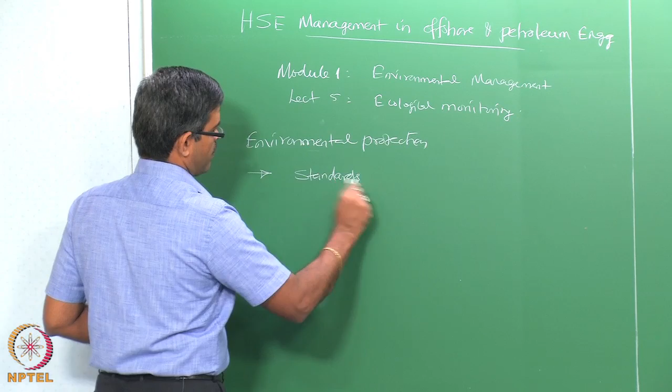If we talk about environmental management, let us say we lead towards establishing or framing standards and requirements. What should we actually consider when we start framing such standards and requirements, or when we are revising them? The standards essentially important to implement environmental protection and govern implementation of management policies should include the following factors.

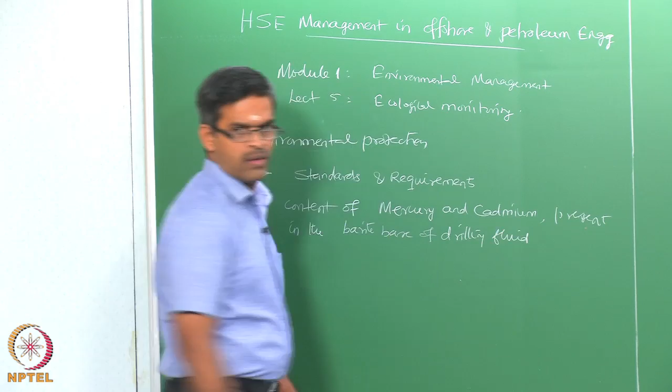The first factor we must consider should be, most importantly, the content of mercury and cadmium, which are very harmful for marine species, present usually in the barite base of drilling fluid, should be restricted and kept as minimum as possible.

The second point is that no discharge of drilling fluid is permitted in waters within 3 miles from the shore. So no discharge of drilling fluid is permitted within 3 miles from the shore.

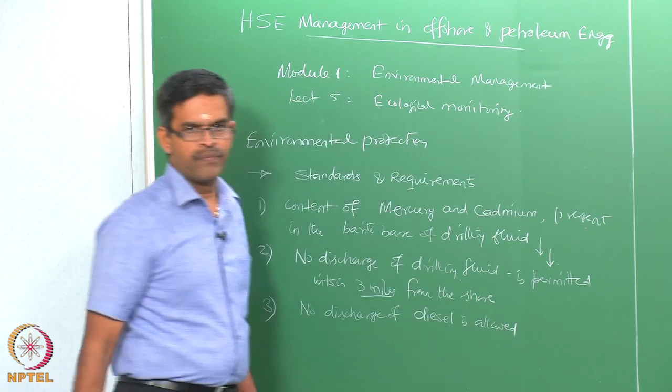At any cost, no discharge of diesel is allowed. At any cost, no discharge of free oil is allowed. This can be checked using a specific test called the static sheen test, used to check the discharge of free oil sleek on the surface.

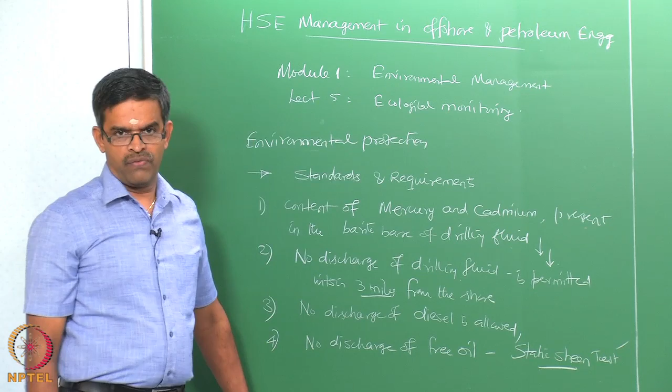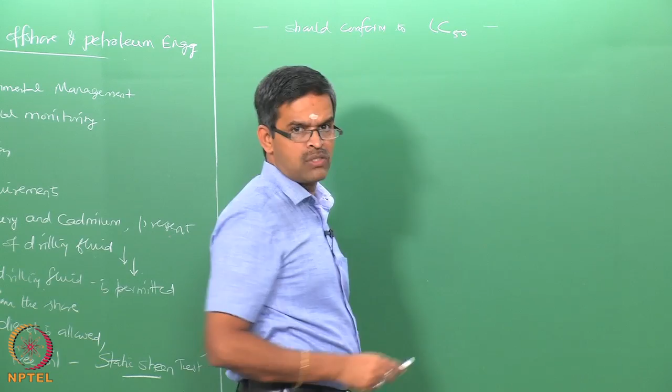This test should conform to LC50 values, that is, lethal concentration 50, we already gave the figure in the last lecture, which should be arrived at based on Mysid toxicity test.

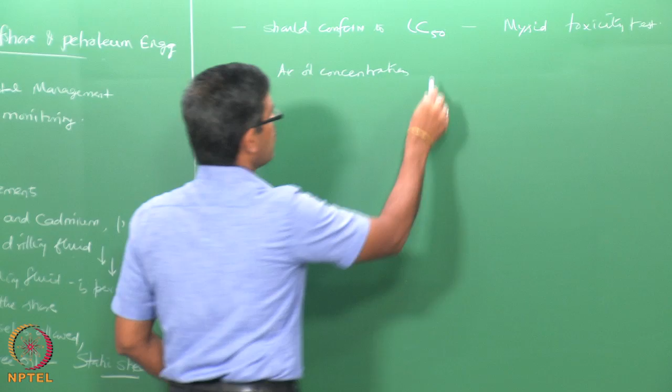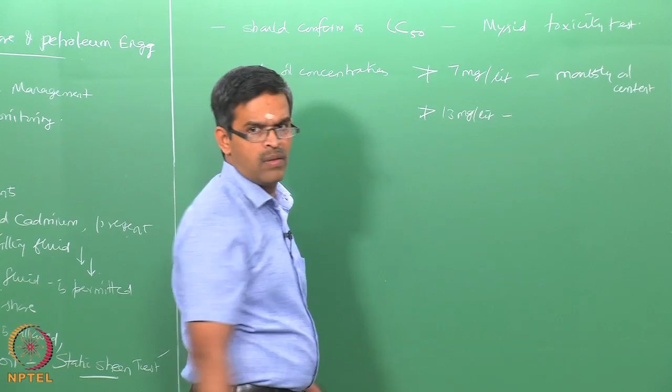Now, the average oil concentration when discharged should not be more than 7 milligrams per liter on a monthly basis, or 13 milligrams per liter on a daily oil concentration basis.

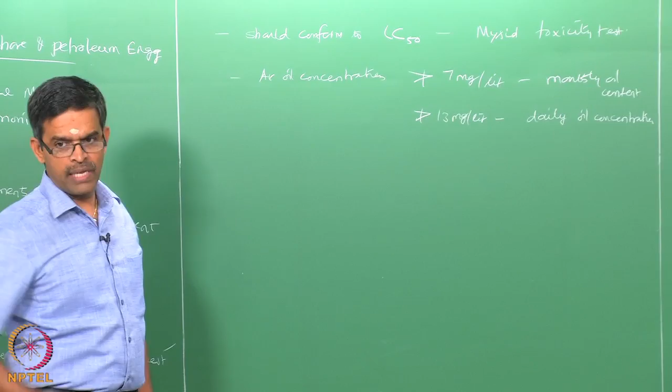Now, the question comes, when an oil leak or oil concentration is found on surface waters, you need to measure them, take a sample, and do the test in the lab to find the toxicity. You also have to take a sample and do the static sheen test to check whether the oil concentration is within permissible limits on a monthly or daily basis.

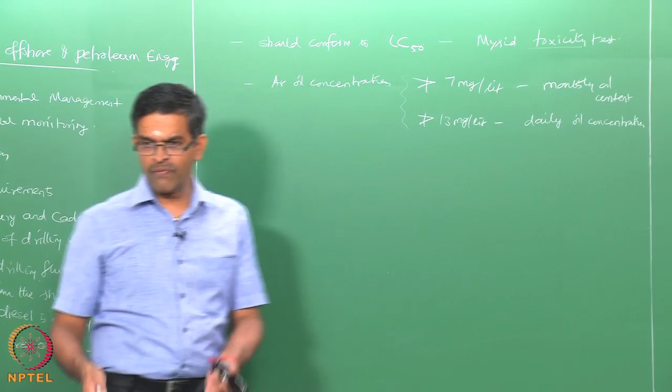Now, where will you collect this sample? Obviously, when you collect samples very near the source of discharge, the concentration is likely to be higher. When collected far away from the point of discharge, they will be lower. So you have got to also specify where to collect this sample. The discharge should be measured within 4 miles from the shore.

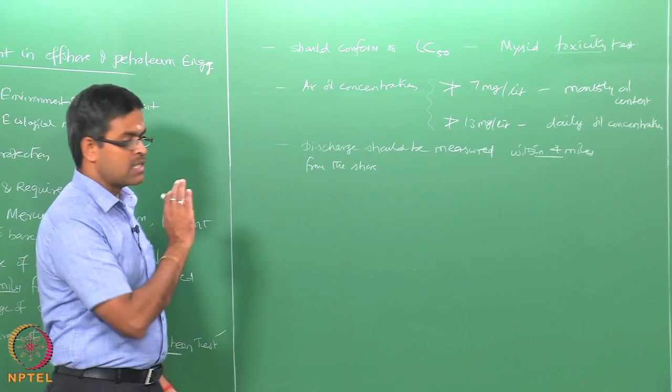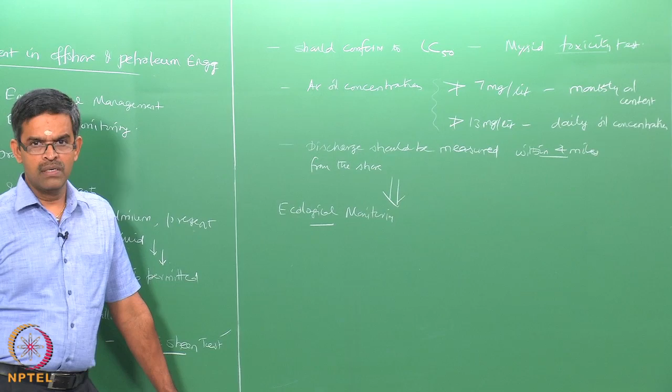This is to check whether it is toxic or non-toxic, or whether it is within the standards prescribed by the rules and regulations of the local agency or not. So all these come under a single frame of discussion, what we call ecological monitoring. Ecological monitoring is an activity, a basic method used to control and manage activities related to marine pollution. It is a system which collects information about changes in natural parameters that occurred due to oil pollution in open sea.

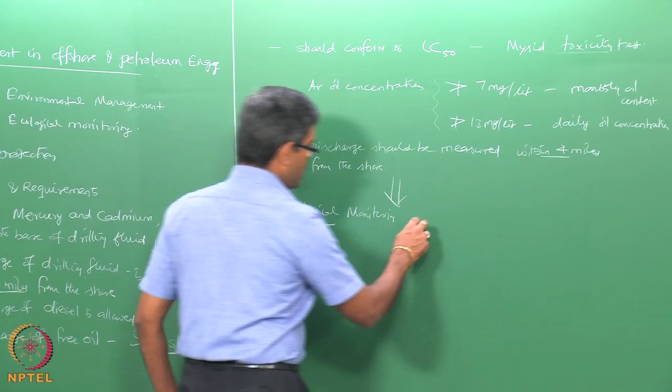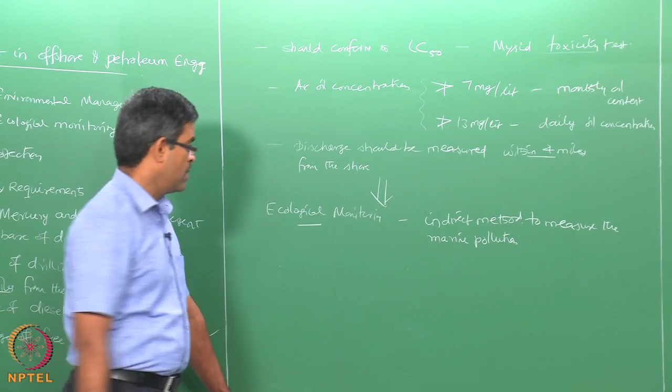So actually it is an indirect method to measure marine pollution. One may ask why it is an indirect method. We are not interested in measuring the concentration of discharge, volume of discharge, etc. Then what are we measuring? We are measuring the consequences that arise from the discharge on sea life.

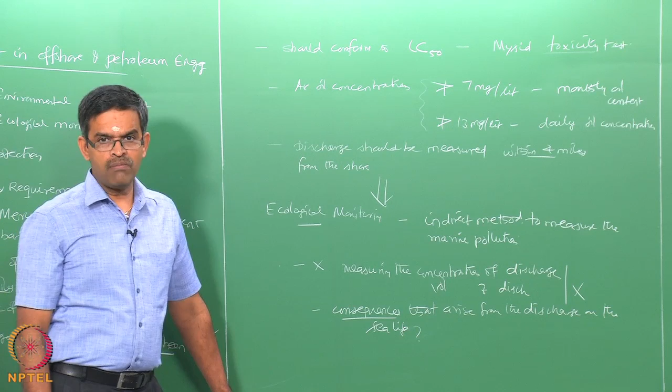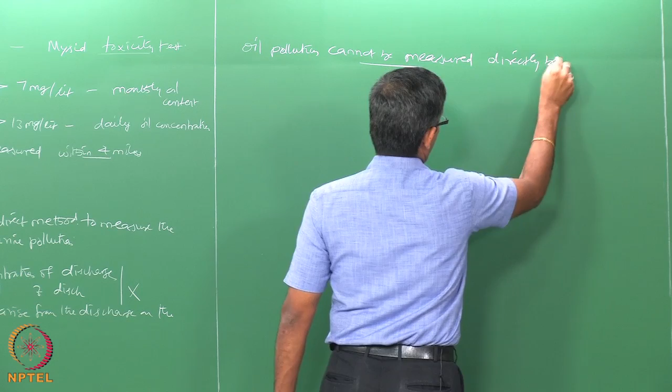Now, one may ask why we are interested in measuring consequences indirectly and then checking whether the pollution is within standard limits. The basic reason is pollution arising from oil cannot be measured directly because of its complex composition. That is one reason. The second reason is its availability in different forms.

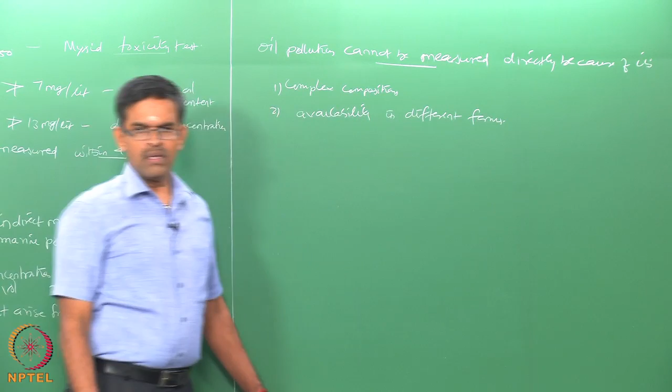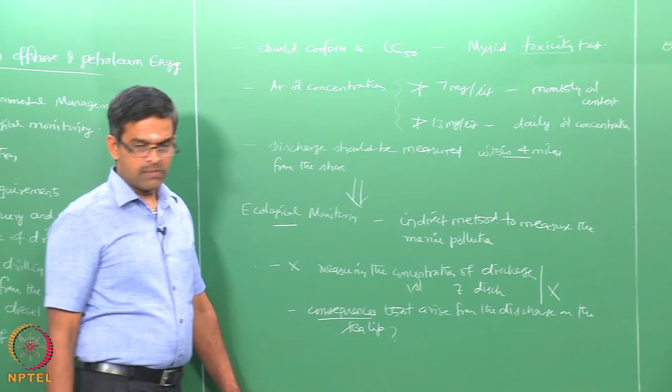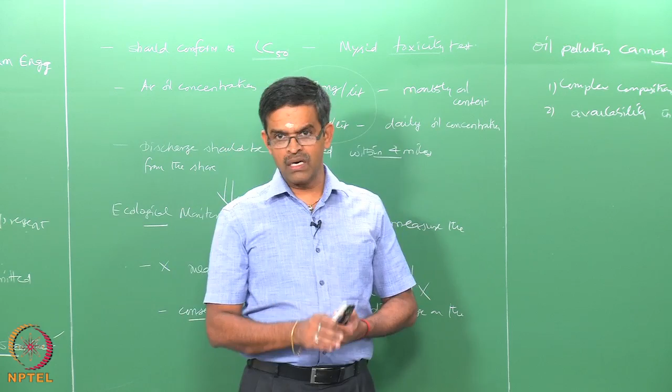Ecological monitoring is a method which collects information about changes in the natural parameters of marine organisms which occurred due to oil pollution. So it is actually an indirect method of monitoring.

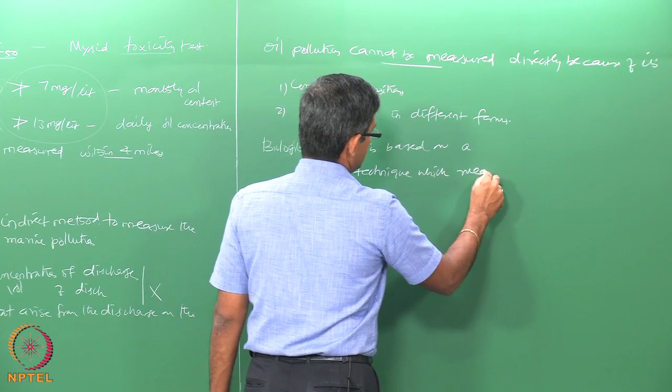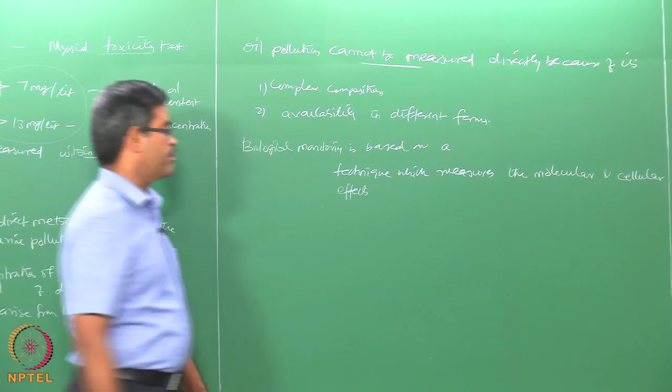You can also monitor this using a biological manner. Biological monitoring is based on a technique which measures the molecular and cellular effects under low levels of impact, which cannot be measured by chemical analysis, because the levels of impact are so low that chemical analysis cannot capture them.

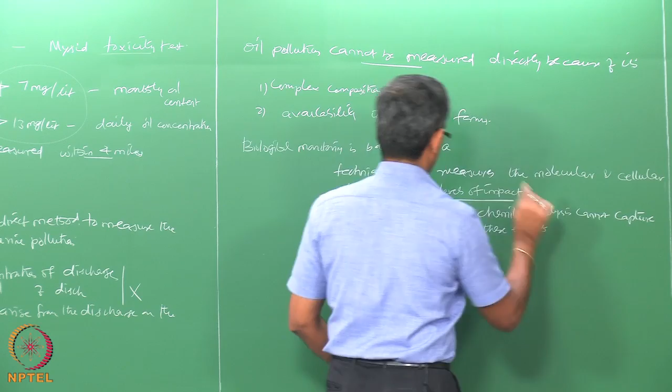Biological monitoring is also a technique which indirectly measures the molecular and cellular effects on marine organisms. Therefore, friends, ecological monitoring in offshore production is done at the local level.

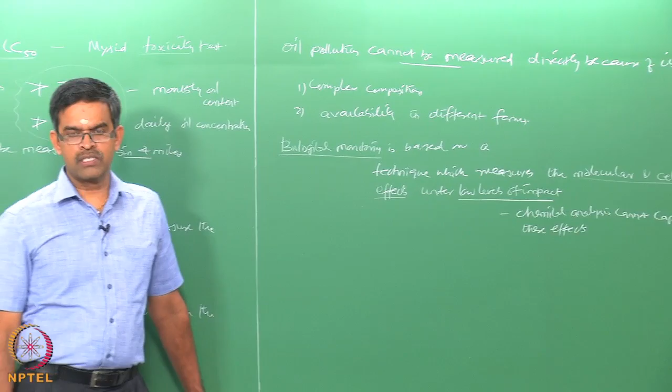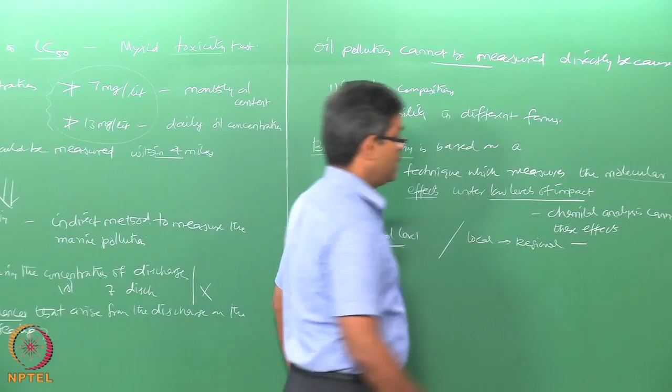You cannot do this at the global level, because the concentration is more local, then regional, and then if it is very severe, it can get globalized, which we already saw in the previous lectures.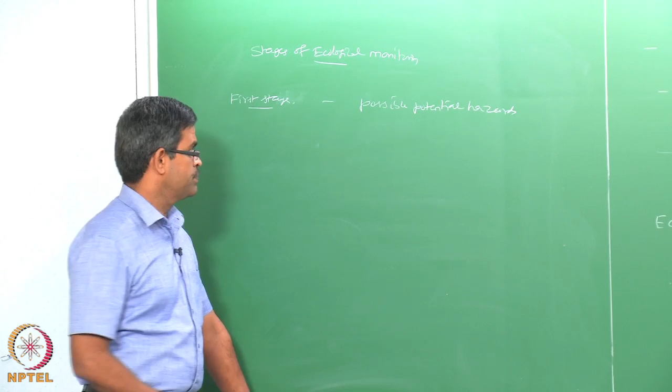Now, ecological monitoring is done in different stages. In the first stage, you have to identify the possible potential hazards which can arise from the impact sources.

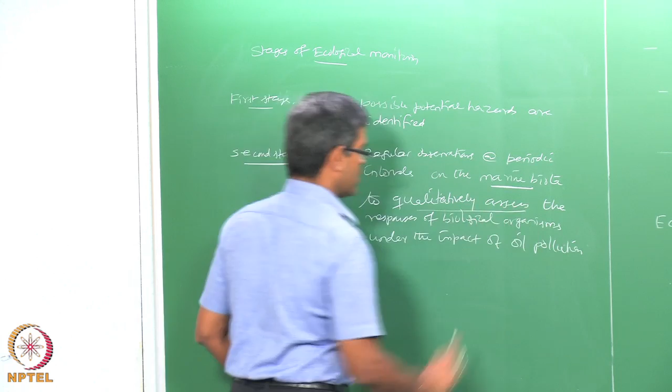In the second stage, you make regular observations at periodic intervals on the marine biota. So it is an indirect way to qualitatively assess the responses of biological organisms under the impact of oil pollution. We measure the qualitative assessment on biological organisms - how they behave, how their functionality is affected, how reproduction is retarded or increased, etc. So you are measuring the consequences with a qualitative assessment - that is the second stage in ecological monitoring.

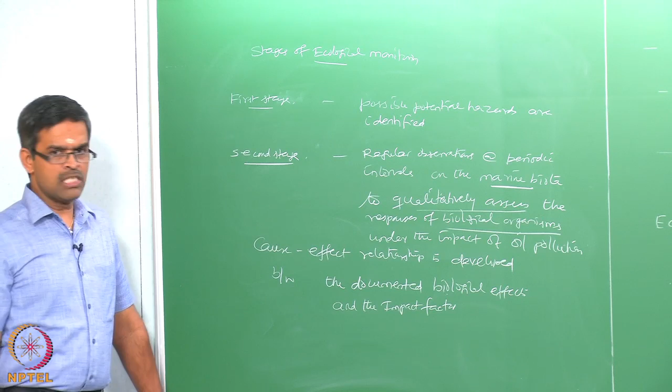Based on this, you develop what is called a cause-effect relationship, established between the documented biological effects on the species and the impact factor. The total impact on the environment and biota, including the impact on commercial species and biological resources, are assessed at this stage.

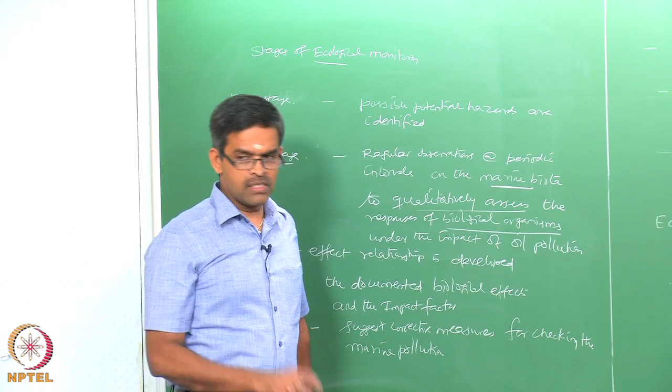Finally, in the third stage, we suggest corrective measures for checking the marine pollution. We can also recommend certain preventive measures if necessary, so that marine pollution can be kept under control within permissible limits accepted globally, regionally and then locally.

Let us slightly move on to the discussions on environmental pollution or environmental management from offshore to onshore. We already know once the oil or hydrocarbon is identified, it is produced or drilled from a specific source as crude oil, and transported to shore for processing. However, these days processing is also done on the offshore platform itself, so that you can save the cost of transporting crude oil, which after processing gives about 60 to 65% waste.

So people are not interested in transporting crude oil from the platform to onshore for processing. They would rather process the commercial product on the platform itself and only transport the pure commercial product for sale directly, so that the discharges or effluent waste which exit from this kind of processing plant can be discharged back into sea waters.

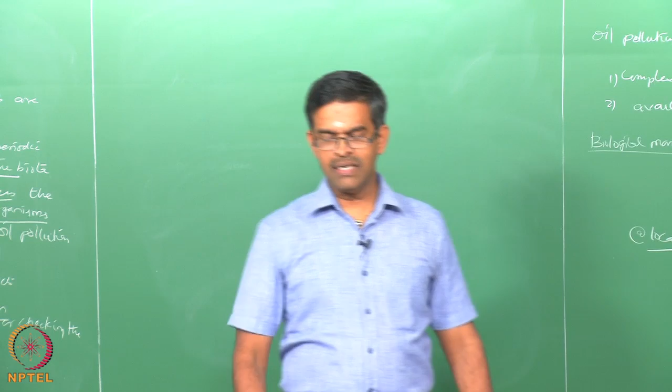So there is another precarious movement which an offshore engineer or environmentalist should seriously focus on. If processing happens on the offshore platforms itself, the discharges which came from oil by accident will now become intentional, because these will all be discharges from the processing plants. However, in the present scenario, these discharges do come to the sea, but they do not come from the offshore platforms - they come from the onshore processing refineries. So we include them in this case as well.

Now, most important aspect here in terms of onshore activities, where we talk about processing industries which do refinery for converting crude oil into commercially available trade species, the most important concern generally comes to atmospheric pollution, essentially caused by the refinery industries closely associated with oil and gas production scenarios.

So to understand atmospheric pollution, we have in the literature two exclusively specific models which are called release models and dispersion models. The release model identifies the type of release of the material.

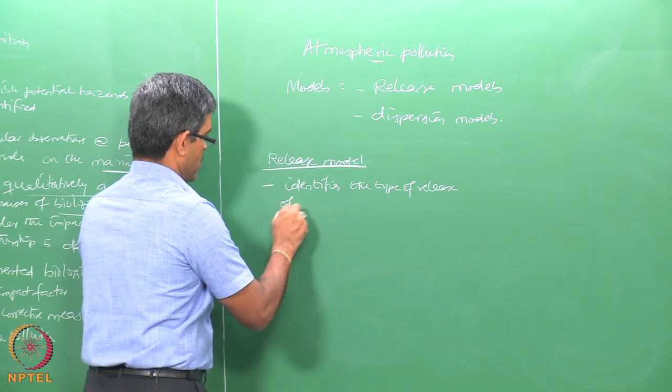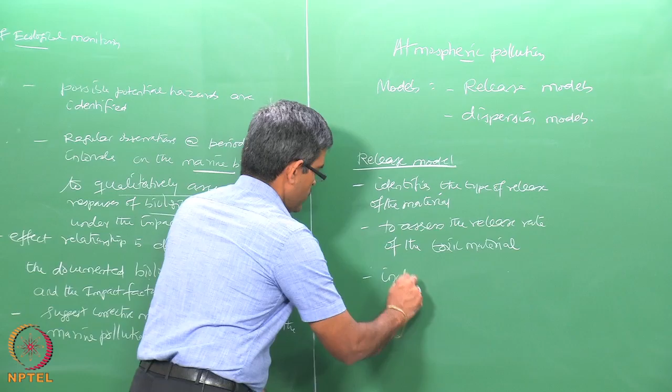This model is essentially used to assess the release rate of the toxic material into the atmosphere. It of course includes estimation of downwind concentration of the released material.

Alternatively, the other model used to capture or understand atmospheric pollution is called the dispersion model. As the name suggests very clearly, this describes the dispersion of vapor in the downwind direction. Now, there are three different kinds of vapor cloud behavior, and one can relate the corresponding time release models in the given literature.

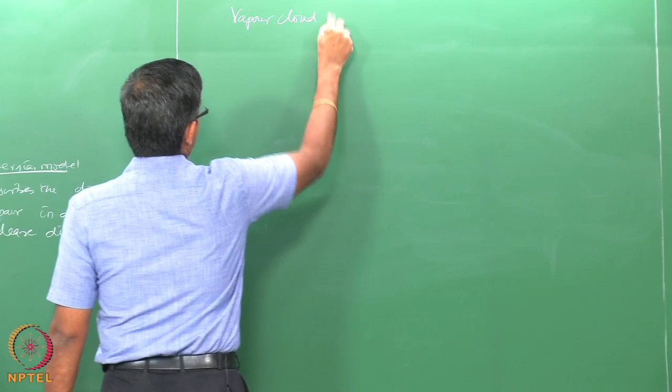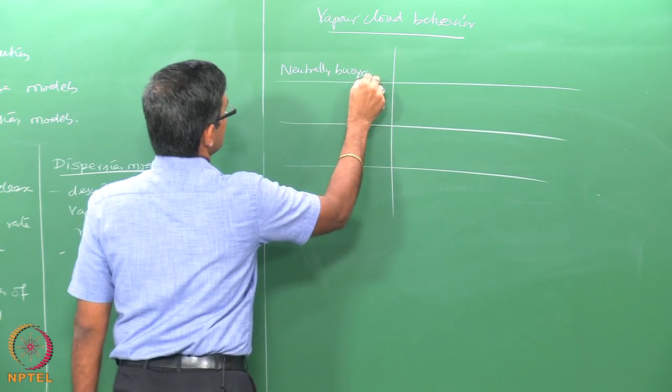The vapor cloud behavior has three essential features. One, it could be a neutrally buoyant gas, it can be a positively buoyant gas, it can be a dense buoyant gas which can form a cloud.

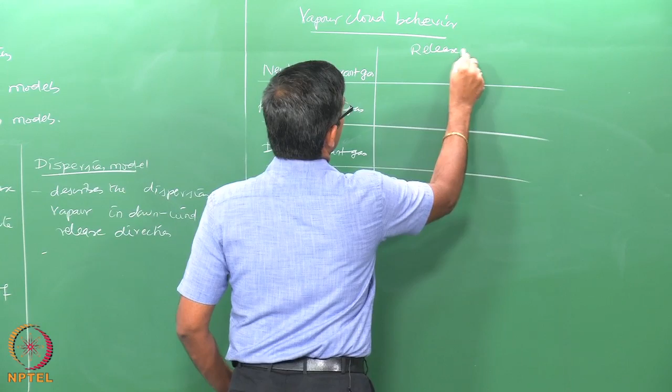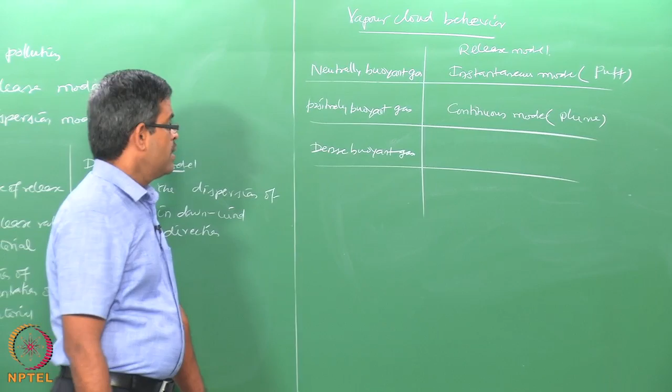The release model suggested to mathematically model this is, for example, in neutrally buoyant gas people use an instantaneous model, called the puff model. To capture the vapor cloud behavior arising from positively buoyant gas, one can use a continuous model, called the plume model in the literature. If you want to model the vapor cloud behavior that arises from the dense buoyant gas, one can use a continuous time varying model.

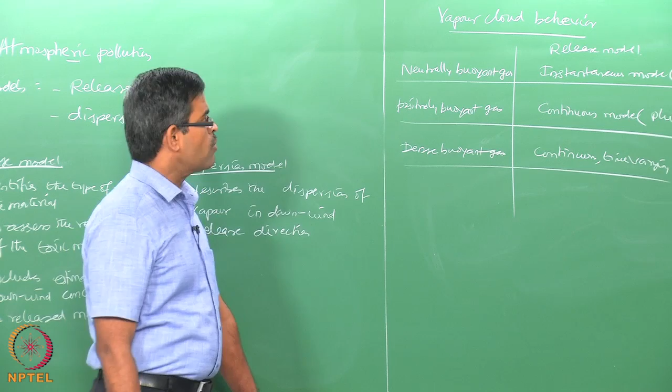So these are the three ways by which the vapor cloud behavior which arises from different types of gas can be captured in terms of dispersion release models. Please look at the screen.

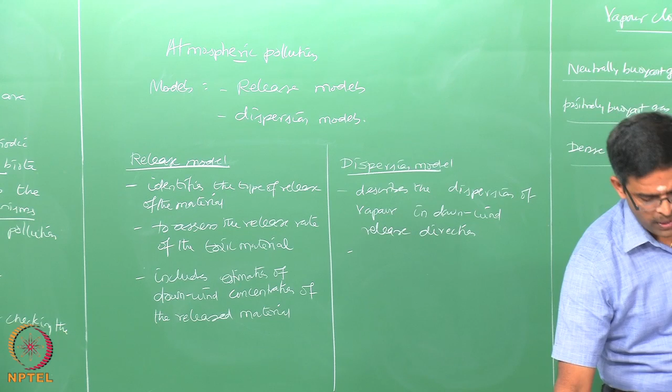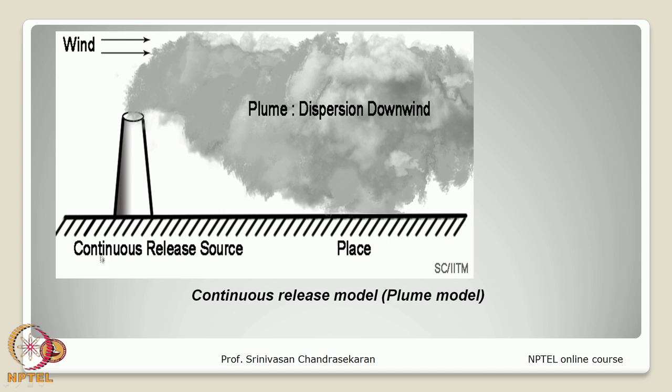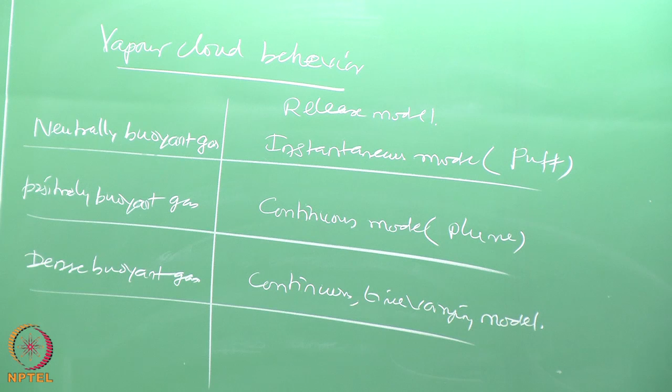Now let us look at the factors which affect dispersion. Foremost could be the wind speed. Depending upon the wind speed, the spread distance, the intensity, and the area of spread will also be governed. So essentially wind speed is one of the important characteristics which should be considered in the model.

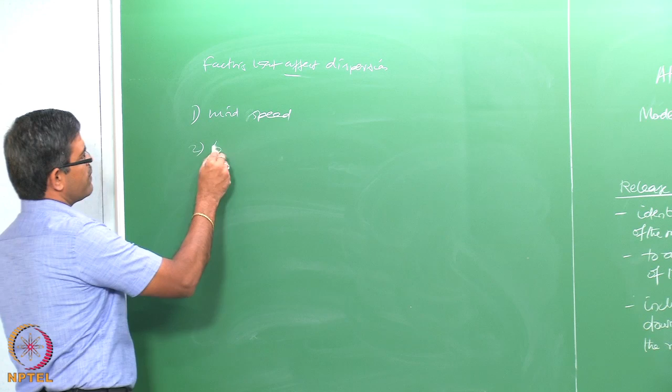The second could be the terrain effects. If the terrain is rough and vegetative, it will have a different effect on the dispersion, conversely with that of an open terrain.

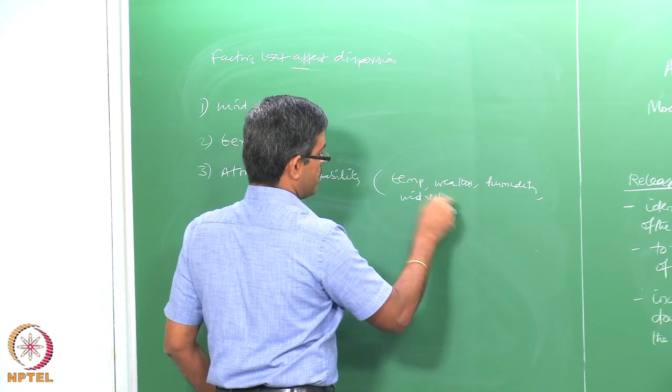The third could be atmospheric stability. What do you understand by atmospheric stability? Atmospheric stability relates to the temperature, weather conditions, humidity, of course the wind velocity and weather climate, etc.

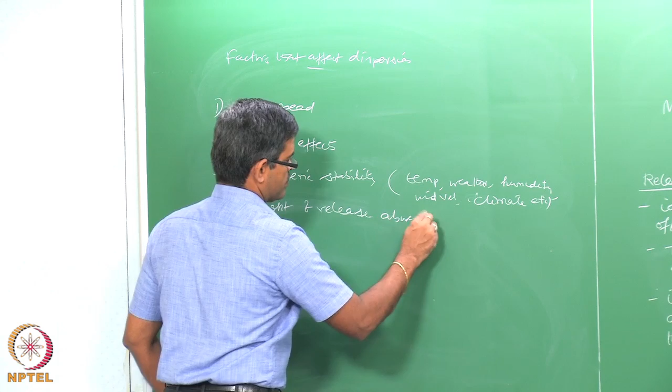So, atmospheric stability. The fourth could be the height of release of the gas above the ground. And lastly, and very importantly, the initial momentum of release. So these are the factors which affect the model that accounts for dispersion on the downwind side.

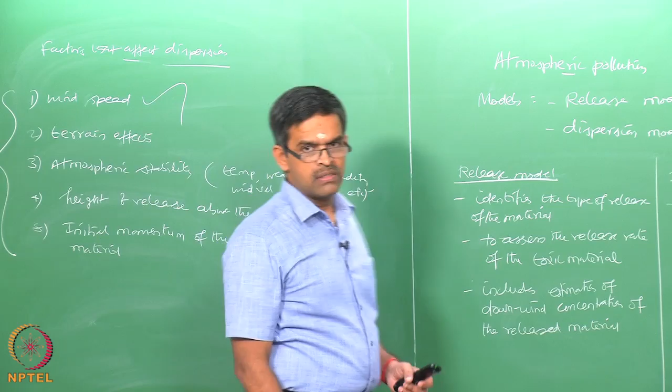Amongst these, let us talk about the first effect, which is the wind speed. The dispersed gas will initially get diluted with the passage of air. So let us look at the physical process. The dispersed gas, or the cloud, the vapor cloud, will get diluted with the passage of air.

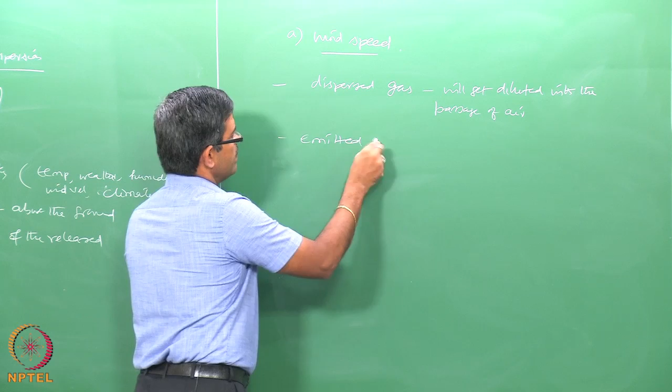Now the emitted gas which is released will now travel forward, and it will also travel faster because of the wind speed. So, forward plus faster. While it travels forward and faster, it further gets diluted because a large quantity of air is added during the travel.

So the foremost issue here is one would like to know what is the wind speed or wind velocity at any specific location. One would also like to know what is the dominant wind direction which is predominantly present in that geographic location.

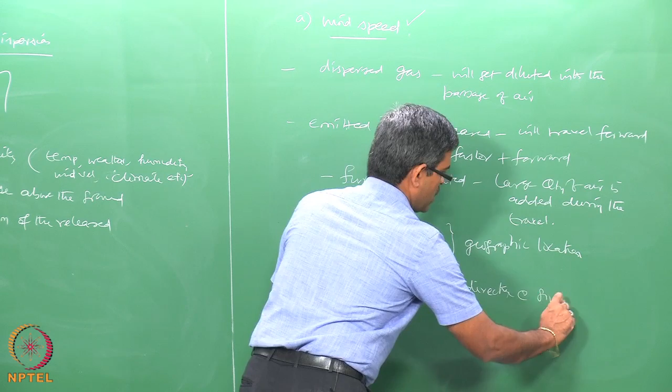One would also like to know what would be the percentage of contribution of wind speed versus direction at any given location of our choice. What does it mean? Does the wind flow at that location circumferentially 360 degrees, or is it predominantly in any specific direction? If so, what is the percentage of contribution of wind speed in that specific direction?

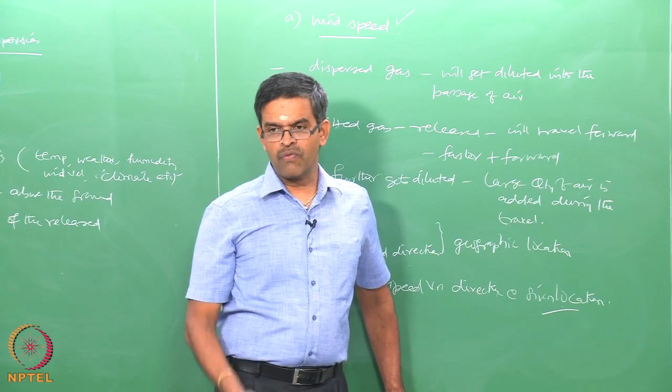On the other hand, you can always locate very easily the predominant wind direction. If you are able to locate the predominant downwind direction in a specific geographic location of your processing plant, you can always design your dispersion system in such a manner that the dispersed or emitted gas can get diluted at a much faster rate. Therefore, the pollution concentration can be diluted or reduced. So where do you get this data from?

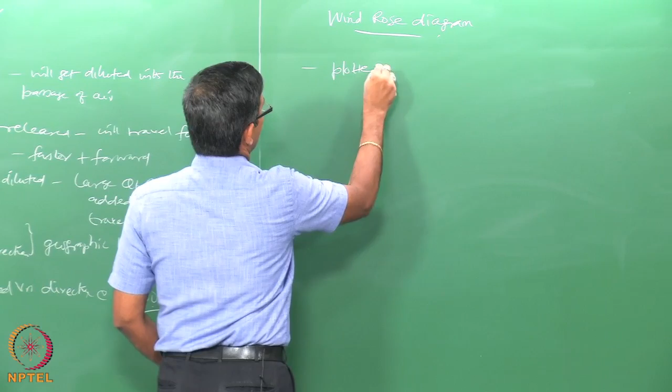We can get this data from what is called a Windrose diagram. Windrose diagrams are actually plotted for specific regions, I can even say specific locations of interest. This should show wind speed, wind direction, and relative frequency at which the wind is blowing.

Why do I say relative? Because compared to all directions circumferentially at that particular point, what is the relative frequency at which the wind is blowing in a specific dominant direction? One should like to know this. Then only you can design the dispersion system in such a manner that if the emitted gas is dispersed by accident, it can get diluted much faster, because the wind speed, wind velocity, and direction are designed in such a manner that the system can get diluted much faster.

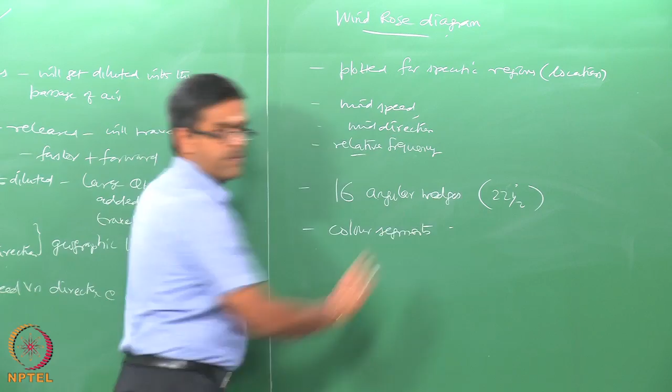So the Windrose diagram comprises actually of 16 angular wedges. So obviously 360 by 16, each wedge will be 22.5 degrees, equally divided. It contains color segments. Each segment represents a specific wind speed when blowing from a specific direction.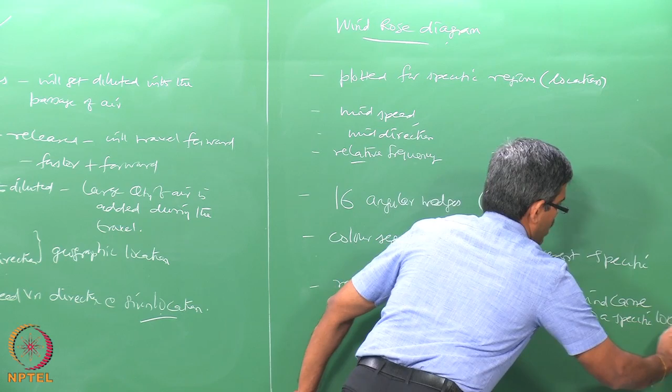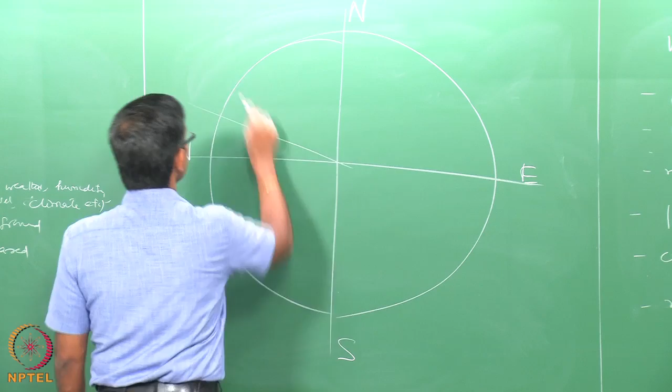So, north, east, south, west. Each is divided into 4 parts. So, 1, 2, 3, 4 quarters, 16 wedges, 4 quarters, 16 wedges.

Each wedge is about 22.5 degrees. I want to name this specific case. Now, I can say this is north, this is west, therefore this can be northwest. I want to name this one, which is more towards north, so I should say north-northwest, because that is the quadrant towards north.

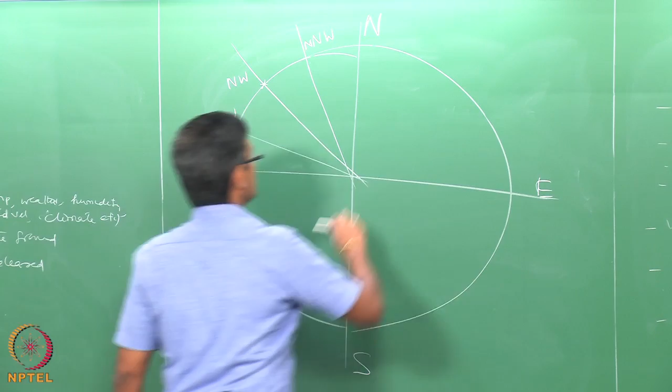I should name this one too. It is again in the northwest quadrant, but towards west. Similarly, let us say this is northeast, this one more towards north is north-northeast, and this one more towards east is east-northeast. You can also name the remaining parts in the same fashion.

So, a wind rose diagram has got 16 segments, each one of them equally divided by 22.5 degrees.

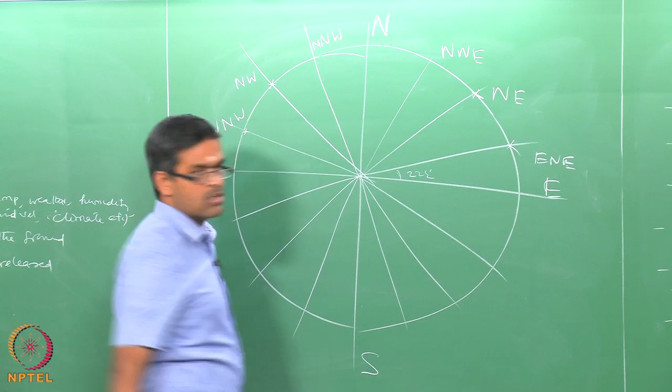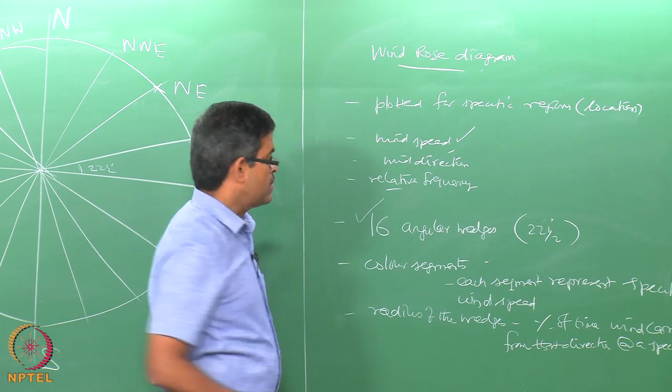So, the wind rose diagram helps you understand the wind speed, the wind predominant direction, and the relative frequency of that particular wind speed of your choice at a specific geographic location at a specific time of interest, because you want to know the variation during the day. You cannot plot this variation entirely on a single scale. You can take any period of interest, keep plotting intermittently, and then take a mean value of the variation of wind speed and of course the wind direction as well.

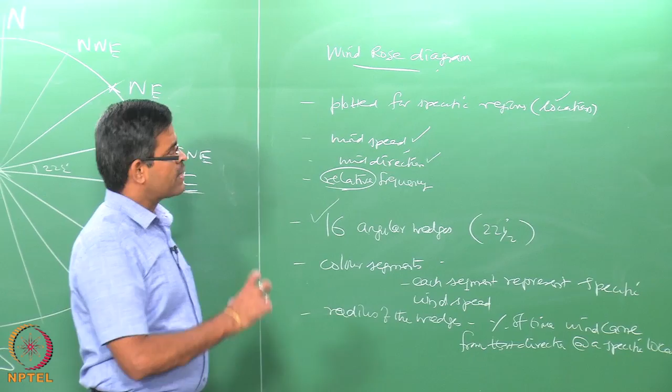So, the wind rose diagram is a very useful graphical tool which helps you actually find out the qualitative and quantitative information about the wind speed, the wind direction, and the relative frequency with which the wind is blowing in a specific geographic location at any specific time of interest.

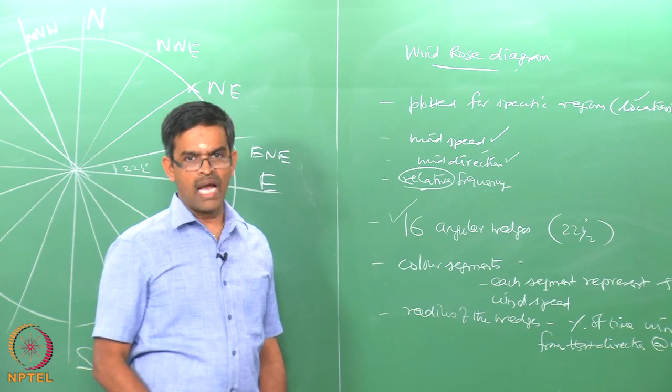Now, the wind speed and direction are influenced by the release which is happening, and this influence is very significant. We would like to know what is that wind speed which can be computed analytically.

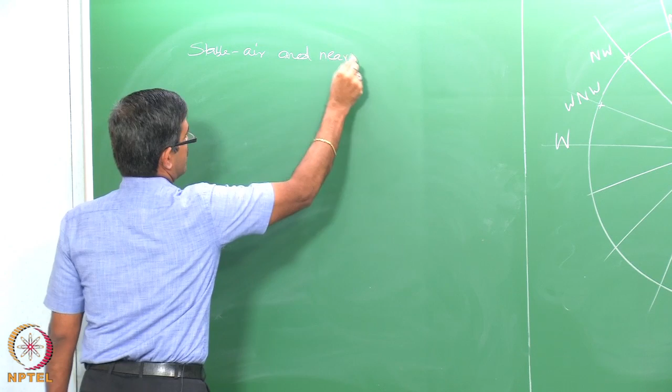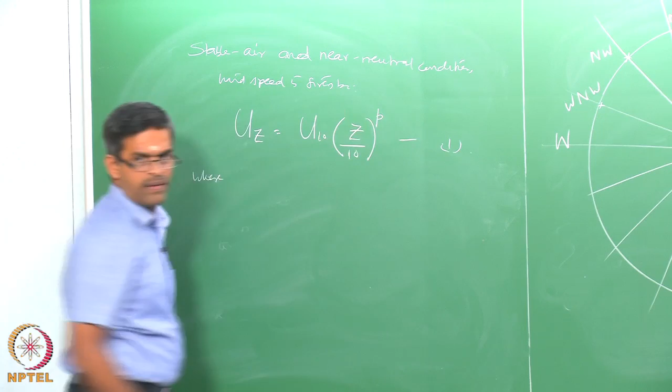So, for a stable air condition and a near neutral condition, wind speed is given by uz equals u10 times (z by 10) to the power p, where p is called the power coefficient. This value is taken as 0.4, 0.28, and 0.16 respectively for urban area, suburban area, and rural areas.

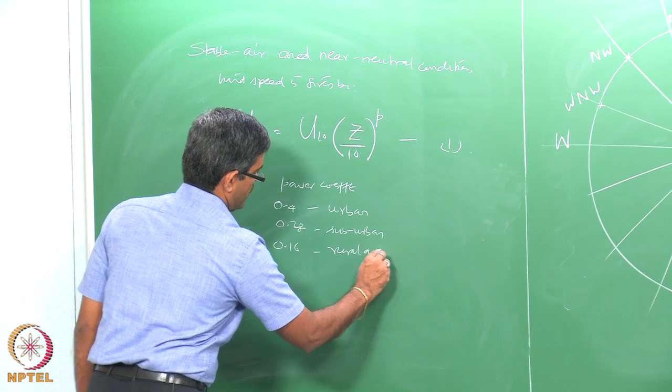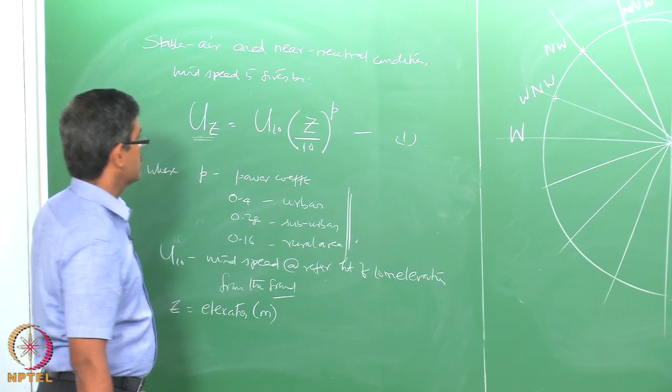So, the second issue which is going to affect the dispersion release models is the terrain effect. The terrain effect will also influence the wind dispersion models very seriously. We will talk about this in detail in the next lecture.

We will also talk about the stability class and the humidity and temperature variation with respect to the dispersion release models in the next lecture. So, in this lecture, we tried to introduce you to the important issues related to the dispersion models which can be discussed and seen in the presentation.